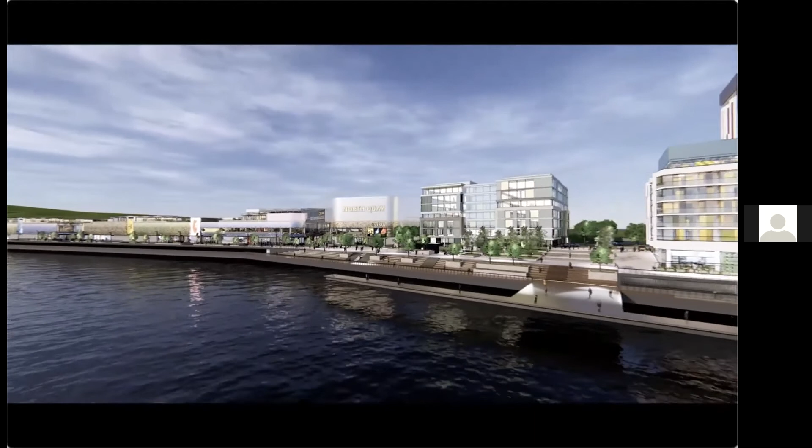So that's the North Quays video. I'm just going to hop back into the presentation now on the PDF, if I can find that.

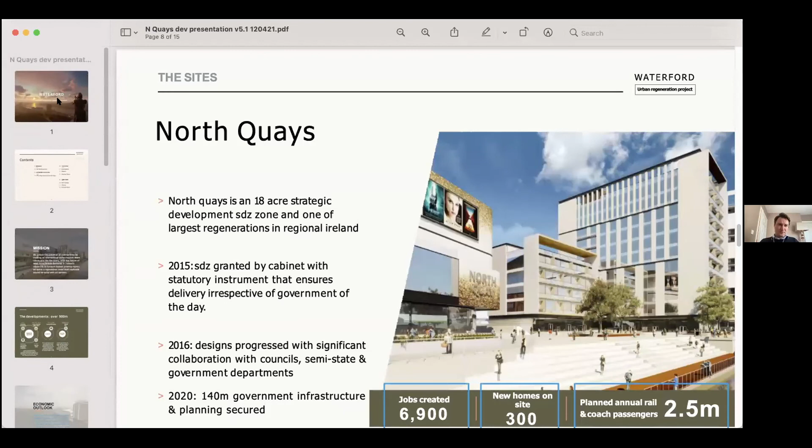It's the largest development, as I said. It's an 18-acre site, secured planning, and a testament to the efforts of the team. It was the largest site ever to go through An Bord Pleanala without significant planning objection first time. We secured planning last June. It's fully commercialized, meaning the hotel is sold, the offices are fully sold, the retail is fully leased, and the apartments are fully leased and commercialized, and we intend to start construction shortly.

But I'll give you the overview of what we're about. In essence, we've got over 900 million pipeline being invested into Waterford in the southeast over the next 5 years, and North Quays is just the start of that. So it's 300 apartments, 15,000 square meters of space for office, which is co-working and unlocks the jobs, so there's 1,500 office jobs going in there. You need a 4-star hotel, which is 200 keys.

There's retail, visitor, tourism, experience center, which is 46,000 square meters. And all of that creates about 2,500 jobs on site and 4,500 jobs indirectly in the community for the southeast, which sees the southeast move from being one of the worst areas for unemployment to the city region having the lowest unemployment.

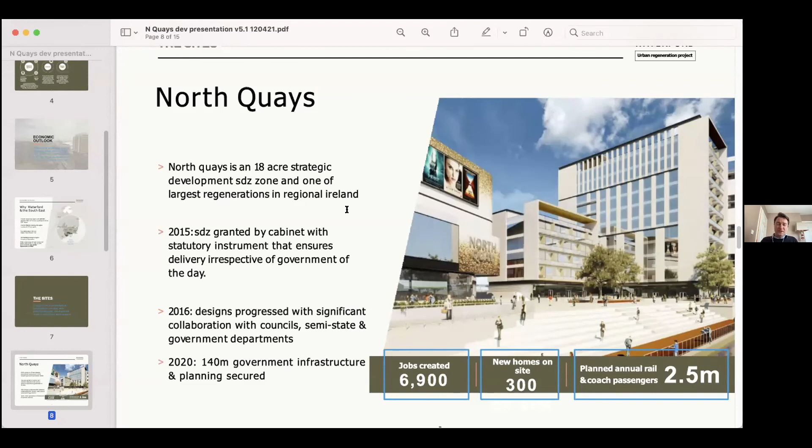The summary is then 6,900 jobs. New homes are only 300 on the site itself, because we viewed that affordable living is better built on the adjacent sites, since it's frankly cheaper to live outside the site than on the site because of the expensive podium piling cost.

And why that's relevant towards housing is Kilbarry housing is 95 acres, planning approved for 373 units. The way we've designed it, we're calling it the most sustainable new village, with 50% less carbon emissions than the standard build. We've got solar tiles in the actual design, so if you're moving into the homes, they're NZEB as well as being energy generating.

We worked hard with both the council and the Irish banks to bring them up to European standards of discounting mortgages, with the credit unions as well, for between 30 and 50 bips. What that means is if you're buying the homes, the savings from energy pay for the value of the home over the lifetime of a 30-year mortgage, relative to spending money on an ICE car with emissions or your benefit in kind.

It's a very new model for Ireland, but it's pretty common in the rest of Europe and the rest of the world. We're targeting that modular in itself will be 20% of the build at the back end, because we see modular being key to unlocking both affordability and faster supply rates.

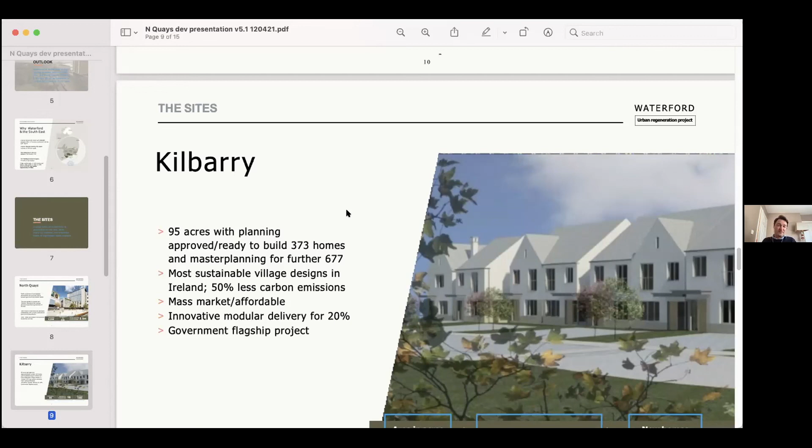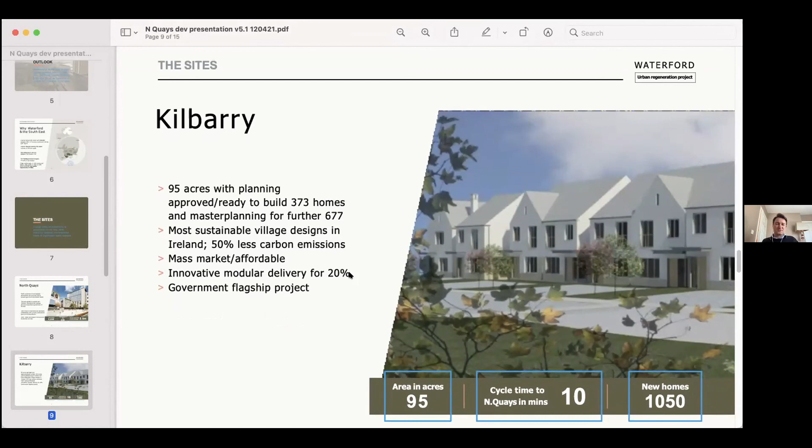This is what we call a flagship project for the government, because the scale is quite significant, and we play an important role in setting new trends within Ireland that are the right trends — connected up, such as car sharing models with connectivity via cycle lanes rather than addiction to cars, and removing the need for a car parking space.

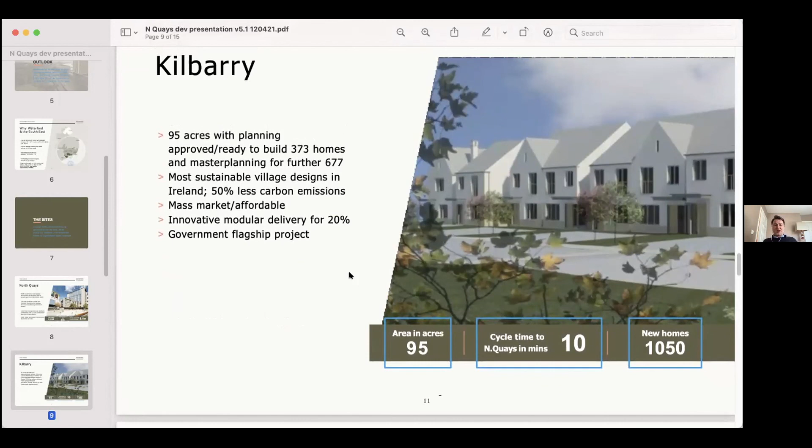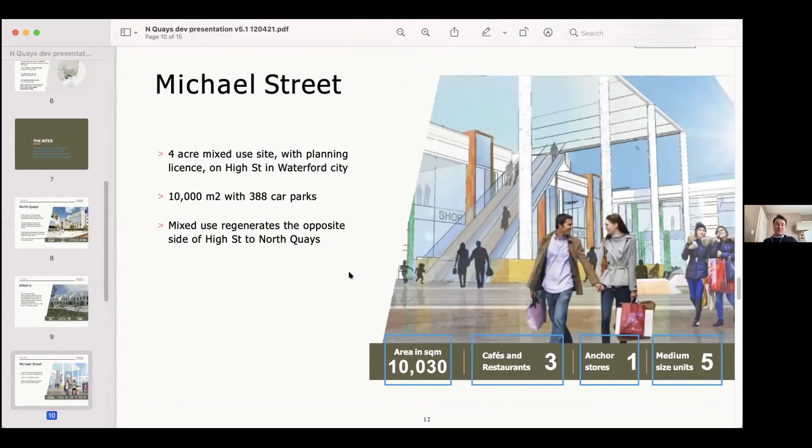You actually can remove it and car share, which is attractive to the younger population. Michael Street is 4 acres, small scale, 10,000 square meters, 388 car park. In essence, we are doing that opposite North Quays, because it's at the other end next to the university, so we'll tend to have outlets and brands to sell that are more attractive to the student population within walking distance.

Timeline on North Quays: where we're at the moment, we're probably 6 months behind schedule because of lockdown and COVID, but in June we intend to get onto site and start building, with the infrastructure going to tender. We've pretty much concluded who our development partners will be, and that will be announced at the back end of June, so we can start build. It's a 3-year build - 1 year for the podium piling, and then 2 years for construction.

The council's build allows them to start in parallel, and there will be about 800 jobs on that side, and then 1,000 on our side during the build phase, which we'd hope to complete, opening in 2023 or 2024. So it's quite a long way off.

In the meantime, Kilbarry and the housing side are going, how do we start to close some of the housing crisis? It's already started yesterday on some of the phases, and that's the good news.

We've got 177 homes on site being built a year. We intend to ramp that up to 200 homes a year in 2022, and then modular in 2023, working with the NSAI on changing the standards to accommodate modular. So we're working quite closely with them.

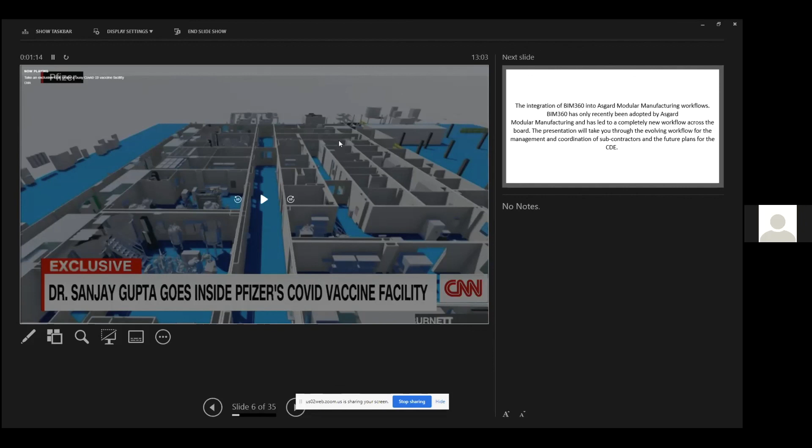To give you a brief synopsis of the presentation, it's the integration of BIM 360 into Asgard Modular Manufacturing workflows. BIM 360 has only recently been adopted by Asgard Modular Manufacturing and has led to a complete new workflow across the board. The presentation will take you through some of the evolving workflows for management and coordination of subcontractors, and the future plans for the common data environment.

Until a couple of months ago, we didn't actually use a CDE here. It was kind of a mixture of File Explorer, Dropbox, OneDrive, and WeTransfer used to share models and files. It's probably not ideal - data would get lost, the wrong files would be shared, there's no paper trail, and other small bits like that I'm sure you've all run into problems with.

So just to give you a quick look at the old workflow first: the work in progress and construction model is stored on a private server. The models are shared with the various subcontractors using WeTransfer and OneDrive. As you can see, there's no real way of managing model revisions or having any paper trail of when models were last edited or shared. You can see from this snip here, there isn't any naming convention used either.

When we were intaking models, they were being stored on the private server, sent usually using WeTransfer or OneDrive links. The models were then linked to the work in progress models and federated models through File Explorer. Models received superseded the previous versions, but there was no real revision management being used - no record of dates or when models were shared, so there was no paper trail. You were kind of losing copies and running into other problems like that.

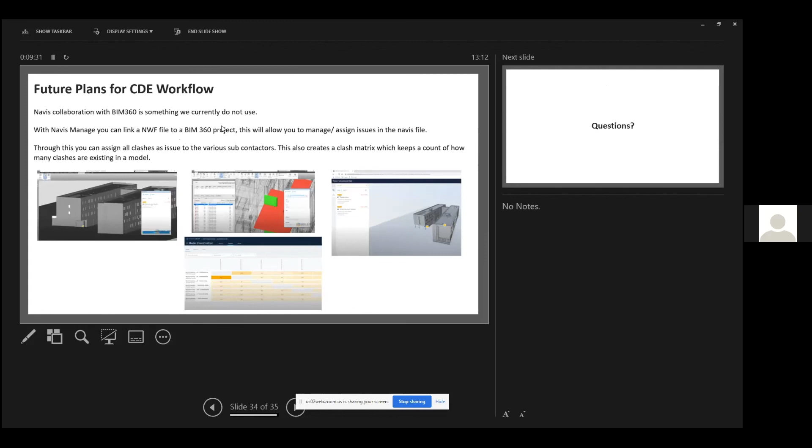Another internal one we're looking at using is for clash detection. We're looking at integrating Navisworks Manage with the NWF file to the BIM 360 project, and that'll allow us to use it for clash detection and assign all the clashes as issues to the various subcontractors. This is useful as it creates a matrix so we can all keep track of it via the BIM 360 project. That's it all then, lads.

That's great, Billy, thanks a million. I'm not sure if Gordon is back with us or if he's gone. Alan Hoare, did you want to pass any comments on that?

Yes, sorry Suzanne, I'm here, don't worry. Just a question there for the presenter: to what extent does the end user request the BIM files from Asgard? I mean, you're obviously providing the physical facility, but do they require the digital facility as well?

Oh they do, yeah, they'll look for an issue-for-construction and an as-built Revit file. And what do they do with it then, Billy? Well, look, to be honest, I don't really know. I think they just like having it for their own records. I suppose they paid for it. Yeah, but I mean, they have an operations team, presumably.

And they would perhaps need it to integrate into their BMS system or whatever? Yeah, I suppose, their management system, and using it for any future facilities management. I suppose most facilities now would have a federated file of their own facility, and they want to drop it in.

We have a question there from Aaron Callahan: great presentation, Billy, was just wondering what led Asgard to choose BIM 360 as their common data environment. Did you consider any other platforms?

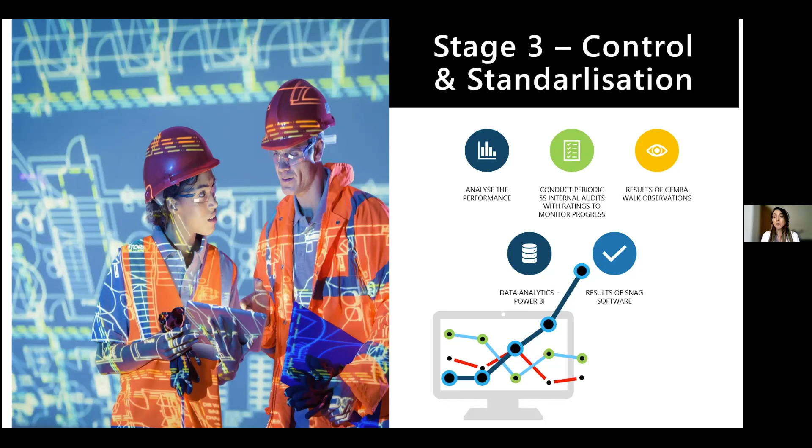Finally, in stage 4, you are going to start continuous improvement. After you get all the results from the previous stage, you can start to think about how can I be better, what can I think differently, how can I improve this process, can I reduce more waste. So you can review your data and try to continuously eliminate waste to improve your results.

You can introduce, for example, an annual 5S and Lean Awards, where the efforts of employees and workers will be recognized. You can share the Lean experience annually with the employees, and you can extend the implementation to other areas. So you can start small, and after, you can start to implement Lean in all areas of your company.

And finally, you can go forward to the next level of Lean maturity. If you're in level 0, you can go straight away to level 1, level 2, level 3, and level 4. So you can continuously improve your level of Lean and focus on the gaps to reach the next level.

Now I'm going to show some case studies. This is one case of a Lean roadmap that my company started to implement in an Irish company. It's a case in progress. In this company, we started with the Lean assessment, the HELMA model. Based on the Lean assessment, we did the gap analysis. We created the Lean roadmap, and we are now in the phase of implementation.

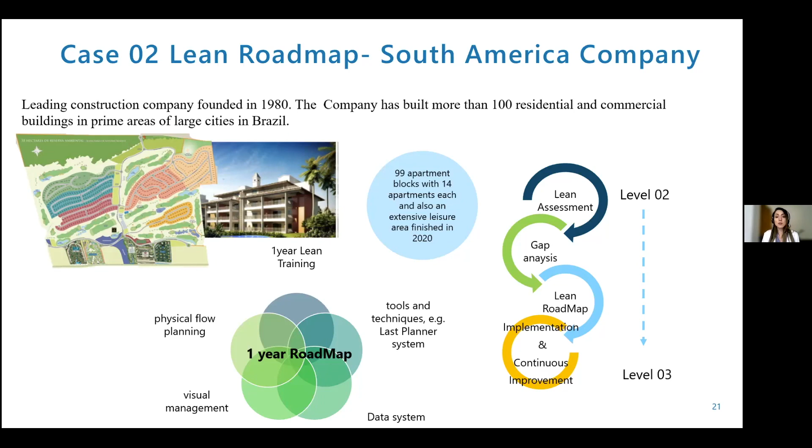So based on the gap analysis, the roadmap for 1 year was created, and all the lean tools that fit the gap analysis were created to continuously improve and make the company reach the next level.

So they start to do the production system design on site. So they start to study the workflows, define the capability, they start to implement Last Planner system and visual management on site. So as this company was already level 2, all the engineers, the civil engineers on site, they already have a great understanding of lean, and they already have the Last Planner system training.

And so, as they were at another level, they were always trying to improve, always trying to see how they can reduce waste. And this was already inside of the company philosophy. So this is why the company was already at level 2.

So some results regarding this company: this is the visual management on board. So they put some TV screens on sites. They put magnetic boards. So on the magnetic boards, you can see all the construction site and where every material was disposed. So it was very organized. They start to create the balance lines.

They start to create visual management with PPC, percent plan complete with quality, percent plan complete with safety. So all the employees go to their room, they can see the productivity, they can see what stage of the product they were at. And they start to put also crew performance with contractors, with subcontractors, and it was showing on a kind of television on site, and also in the cafeteria.

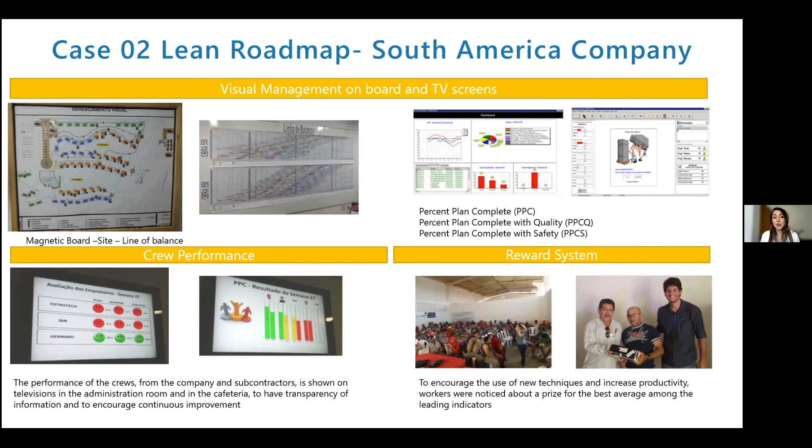And they also start to introduce site digital solutions. So they noticed that there was a need to ensure accuracy in the measurement of indicators of all services. So they start to put control of services on mobile devices on site. So the data was sent directly to the system database via Wi-Fi. So they start to know when every apartment was finished, in which time, which crew, and what service was happening, straight away in real time.

And they also put some tablets on some machines. And on these tablets, they could see a daily program of activities in priority order. So it makes the operator know about the block and the activity which they should go and do. So it improves productivity too.

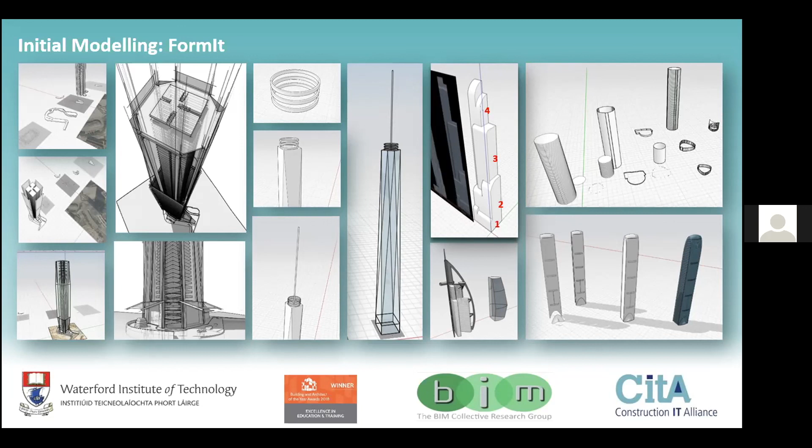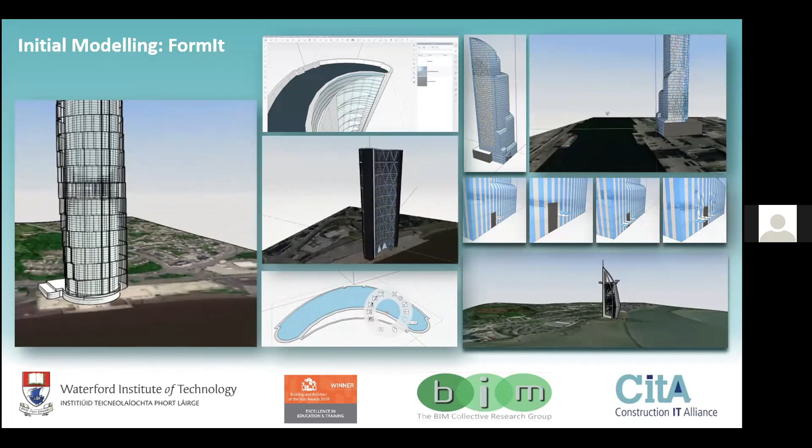This is where they're bringing in images and topography into FormIt and doing that initial modeling. You might recognize some of these locations - it's something we could have a quiz with. Model development, then bringing that from FormIt into Revit - Revit is used to enhance the model, but also as a stepping stone into other software and tools.

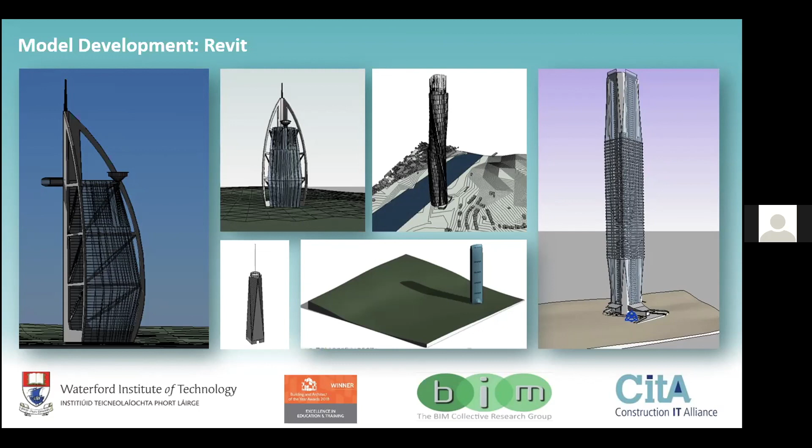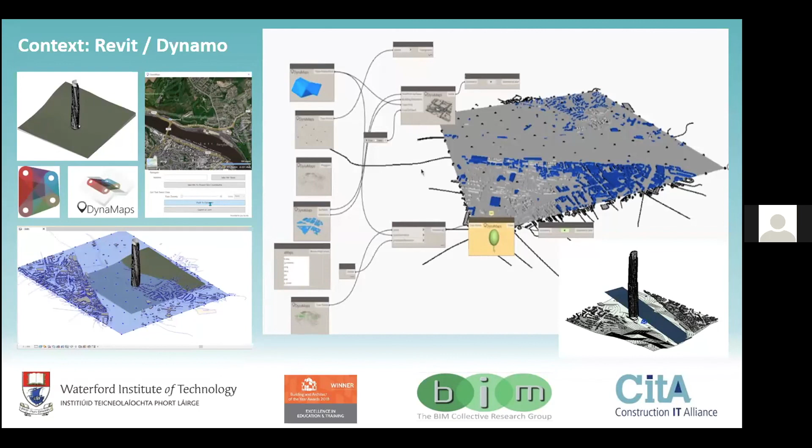Some of the students looked at bringing Dynamo into the process to create context, using Dynamo - you can see all the links of Dynamo visual programming. And then FormIt for some solar analysis. These models can get done quickly, but there's also then the ability to do analysis from them - looking at the energy of the sun hitting the building and helping in that design process.

Some of the locations you might recognise: New Ross, Wexford, Waterford.

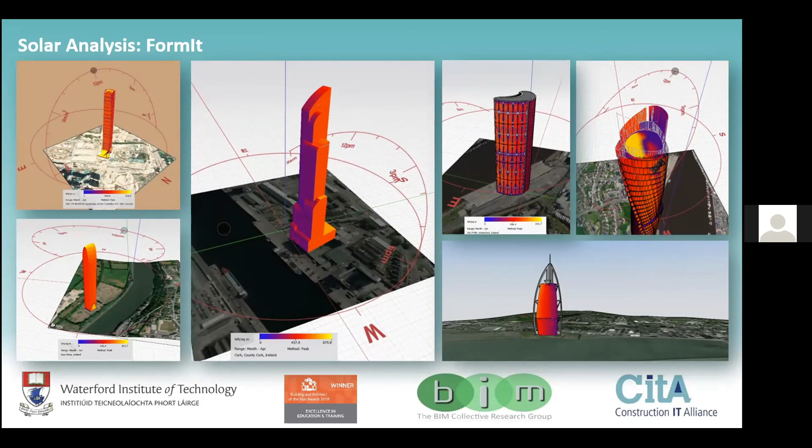Okay, if it clicks, that video isn't coming through here yet. But that's based on some analysis. Let's take the project and run it through.

What you should see on the screen, there are lots of options for selecting types of glaze, different facades and different types of materials. We can click on there, using Autodesk Insight software. One more click and that'll play. This is great for visuals.

It's flow design, wind analysis, and you can bring your model in and get really informative information on how these towers are performing, and different ways of analyzing that information. We had an excellent talk by Chris Bacala, who's worked on tall buildings around the world, including some pretty famous buildings.

He was telling us the ability to have this type of analysis in the early design process would save tens of thousands. He explained that to get a model made and wind tunnel tested is in the region of €30,000, so testing some designs early on is great.

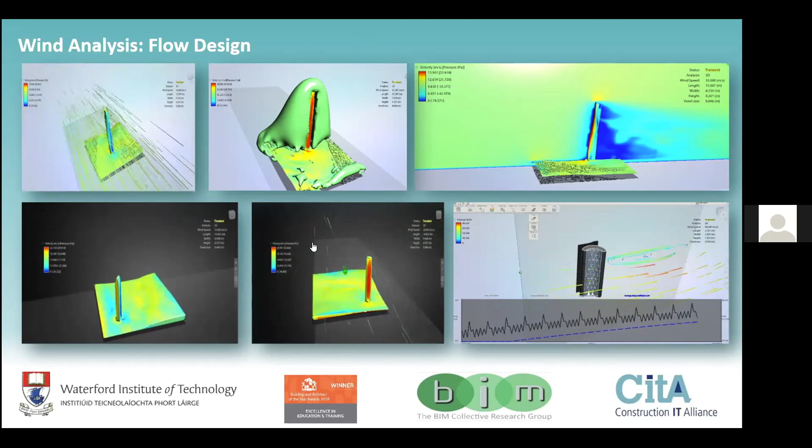And click. One more click. So this is a piece of software that we... sorry, go back one.

Well, let's move on one. Do you want to click there, Suzanne, please? Do you want that video to play? You're okay, we'll move on.

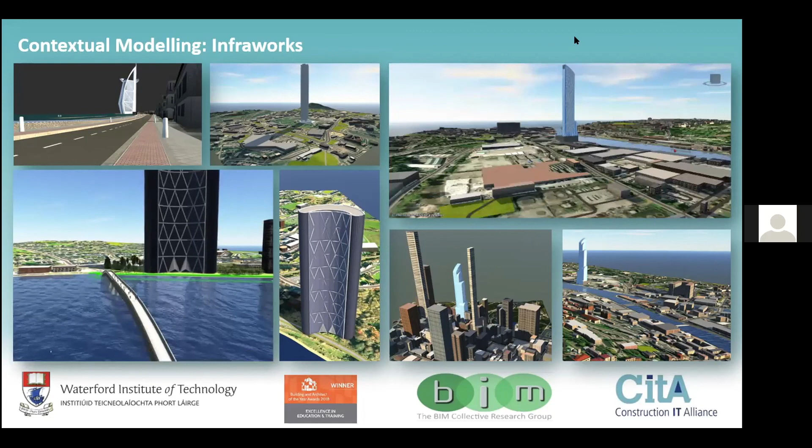Linking into Enscape, just go back one. Linking into Enscape and doing some visualizations from there, which is becoming pretty standard now, with students finding that to be a better place to do their renders rather than trying to render out of the render engine from Revit.

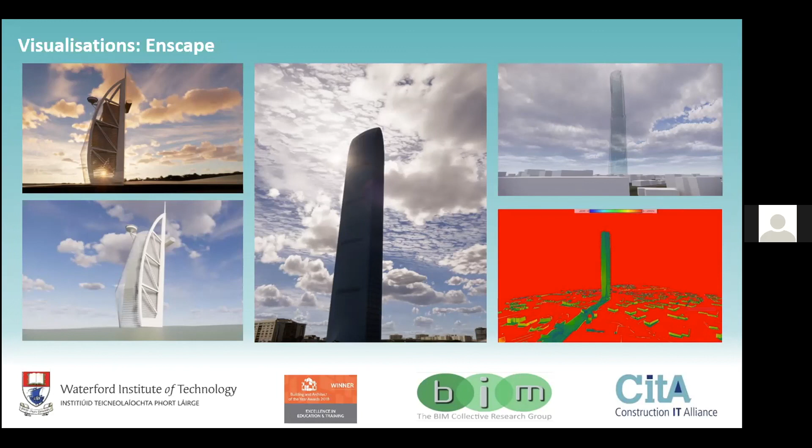It's just a quick taster there of a kind of good fun project, and I think it's great to get these images coming in there with the backdrop of Waterford Harbour.

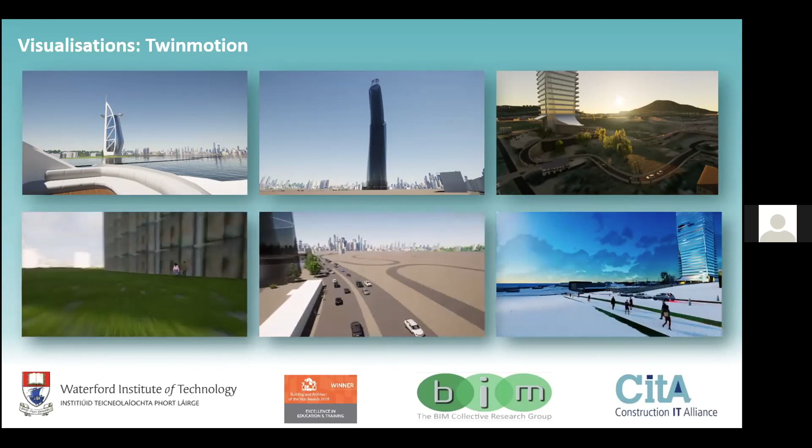So well done to all the students on that, it really does show how our industry is changing, has changed, and is continually changing, and how we need to keep up to speed with where we're going. Thank you for that, that was just a quick short piece, a wee taster.

Okay, so I think we're over time there, Suzanne. We are. I think a lot of people have had to drop off in the last few minutes. So yeah, but thanks for that.